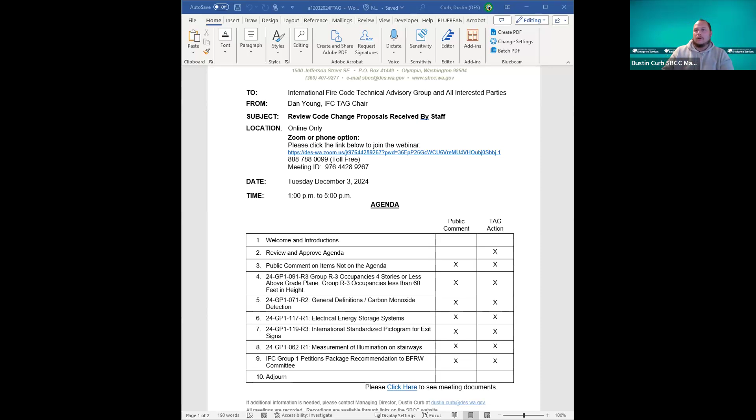So the hope is we get through all that and we have green on all these. And then when we come back Tuesday, we're just going to review this document, talk about anything that needs to be talked about, and move it to the committees in between some of the stuff we're doing. So just, now Dustin, we still see- let's just do the agenda. Yeah, sorry about that, I thought I pressed the final button and I didn't. There we go, we got red, or we got yellow and green. So that's what I think you wanted. All right, yeah, thank you.

So this document is the spreadsheet we've been using and trying to update online. In between the other agenda items today, I'm going to be going back to this to update it so I can be as ready as possible to get this updated and uploaded for Tuesday's meeting next week. So just as I mess with that, bear with me.

Let me pull up agenda item number 4, which is proposal number 091, revision 3. This one was heard at the correlation group last week, and there was a revision put forward there, but it hasn't been seen by this group yet. I'm pulling that up now. And Ken, you're the proponent on this one, and you weren't present there for this revision. I'm pretty sure I sent it to you. Did you have time to review this at all?

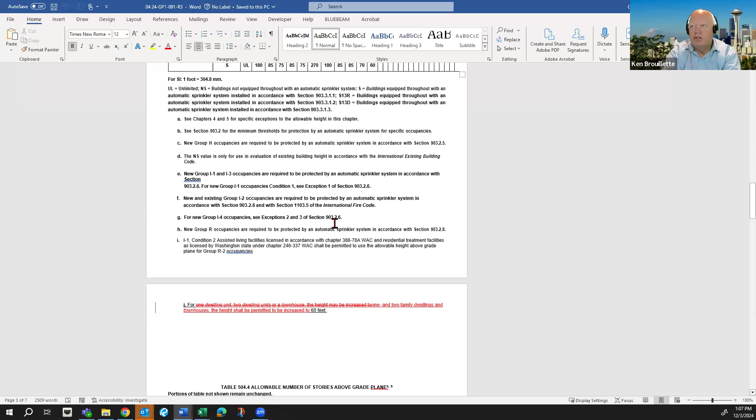Yeah, I have reviewed it and just got a couple of comments on it. First, thank you everybody for meeting without me and trying to work on this. Jeff Shapiro did submit this to you, right? Yes, these are the revisions.

So I've been looking at this a couple different ways. And I guess one of the issues that's still being worked out is the whole occupancy classifications for townhouses. And what he decided to propose is go ahead and just delete that 13D line that I had added in there, which is fine. And then under the R3 section, just put in - make sure I'm in the right spot.

Yeah, he moved the footnote J from the 13D column over here to the type 5 construction line. So what I was hoping for - and in the product I'm looking on my screen right now - is it would just be, and you got to tell me if it's the right way to do this or not, is it cleaner to move forward without showing all of these changes? Because the proposal came in, we modified it, then we have another modification, but when it actually gets presented and moves forward, we're not going to show that this 13D got deleted.

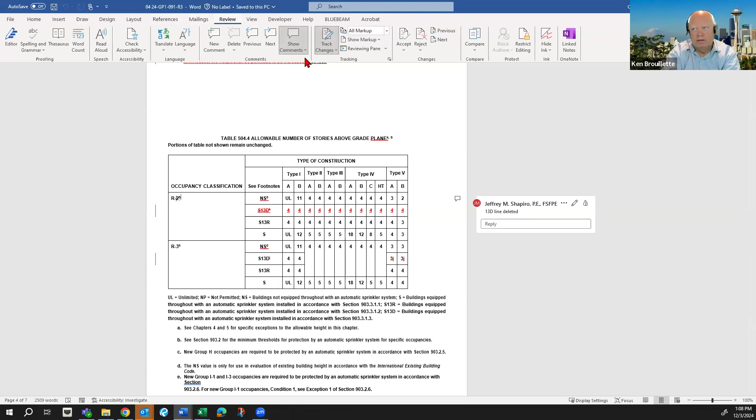I do agree that not showing all the track changes in here would be easier for review. So let me pull up the reviewing pane and just accept all these changes that are in here, and we'll review it that way.

Sorry, this takes me a little time here. I wish there was an accept all button in here, but I guess - there is, if you go up to the accept at the top and click down on that, it accepts all changes and stops tracking. Awesome, well I appreciate learning that today.

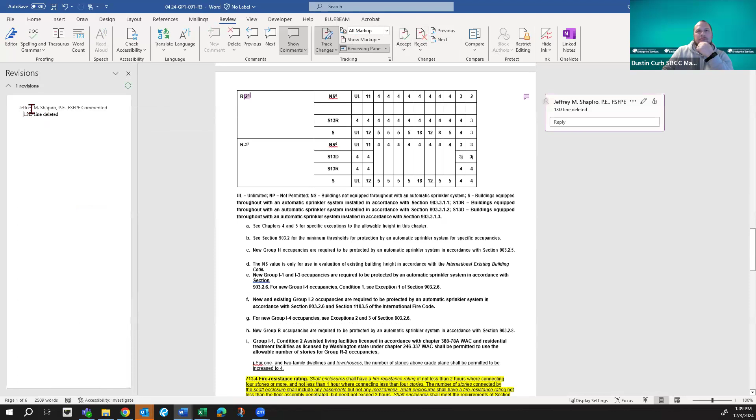Accept all changes - why is that not done? Well, you just need to go up into the comment box and delete that entire line underneath the non-sprinkle row. Yeah, there we go. The box in the table is the only other thing you would have to delete. If you just went up into that box into R2... Oh, I got you. Yeah, remove the line. Exactly, just delete that whole row. There you go, delete entire row. Ta-da, there we go. Okay.

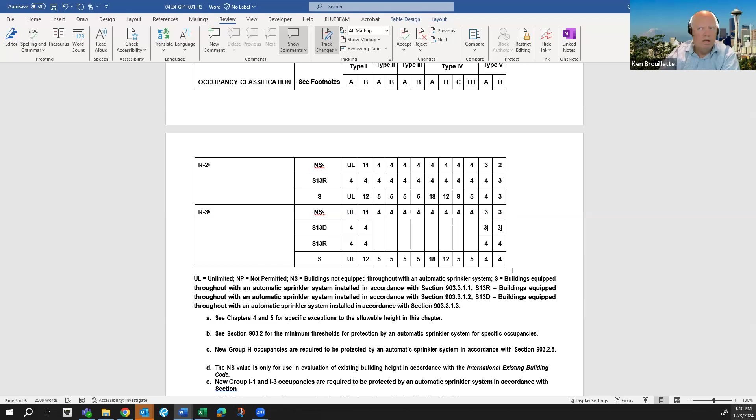All right, so then in the R3 section, he just has the footnote J that was added to the type 5B, and took it away from where it was before next to the S13D. And the footnote J had just been reworded, and just says for 1 and 2 family dwellings and townhouses, number of stories above grade plane should be permitted to be increased to 4. So that would be the only footnote for that table. And then that was 504.4.

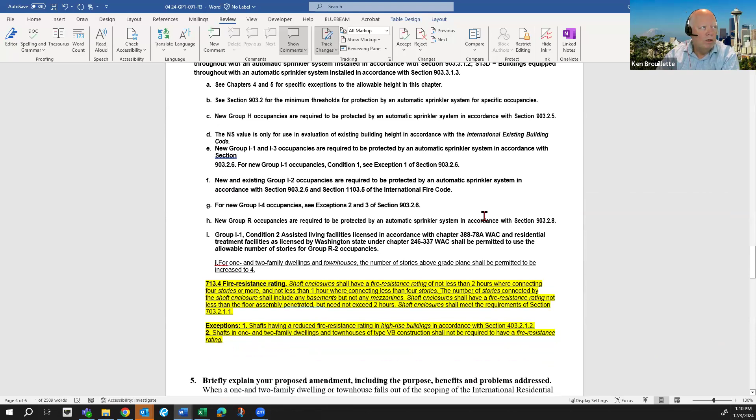Can you run back up to the 504.3? And under the R section has the 2 footnotes there also, as J, and has the same language for 1 and 2 family dwelling towns - the height should be permitted to be increased to 60 feet. So just a correlation for the stories and the feet, which I'm fine with those 2 changes.

And then I guess what was discussed in the meeting was the building code, the 713.4 section for fire resistive rating. So this was something that was added in, right? That wasn't in the... Correct. Okay, so I had a conversation with Ardell Jala, our Seattle building official, this morning.

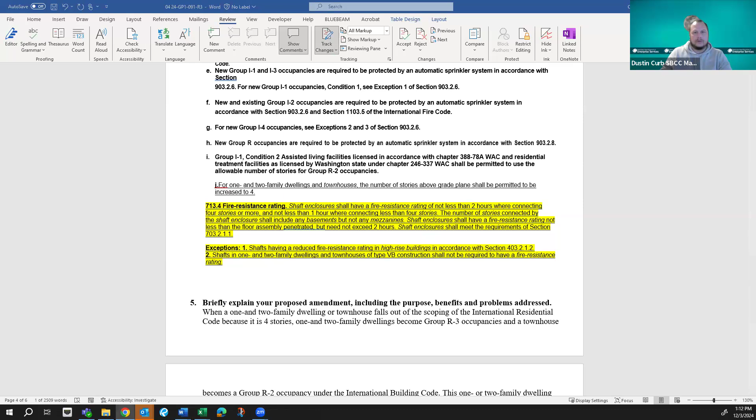I think she's also on the call today. Micah, do you have the 24 building code available? Can you pull that up? I can pull up the online version. Hold on, if you could pull up 712... I'll wait till you get there.

The hot link, the 2024 model in here. Yeah, we got to get you the building code.

Why can't we get the state to buy you an enterprise account for ICC? I think I'm interested in doing that. It is kind of my discretion at this point, and the more I deal with it, the more it seems appropriate. About 712.

Ardell and Micah pointed out section 712.1.2, because we were looking at how we were allowing this in Seattle in the past without worrying about the shafts being rated. I believe this is the correct section: unconcealed vertical openings totally within an individual residential dwelling unit, which we're talking about, and connecting 4 stories or less shall be permitted. So that's where the shafts were not having to be rated.

Hopefully I'm interpreting that the right way, but I don't think exception number 2 is necessary in the 713.4 section, but I'm willing to listen to anybody else that has comments on it. Well, Ardell's unmuted if you'd like to go. Nope, he covered it, that was it. Okay, well, there's no hands flying around, Ken.

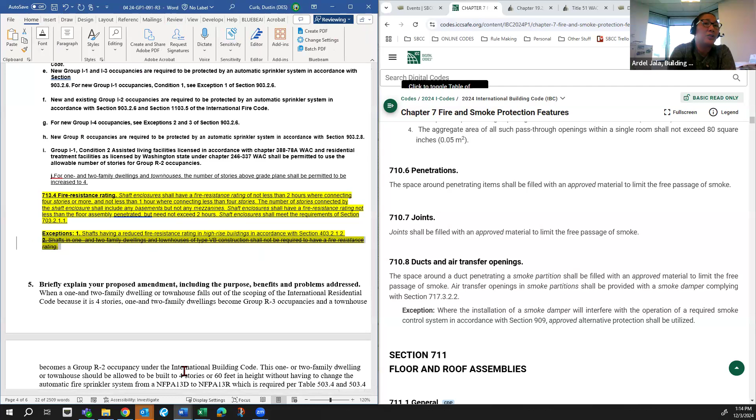So you wouldn't need any of that section at all, Ken, correct? Yeah, we would not. So 713, what he shows there highlighted in yellow is just a reprint of the base code right now. The only thing that Jeff was adding was an exception 2. Okay, so with that one gone, we kill the whole highlighted section. Exactly.

Should have turned track changes off. There we go. So just adding some footnotes in here with some changes in the tables. And you like that one that way, Ken?

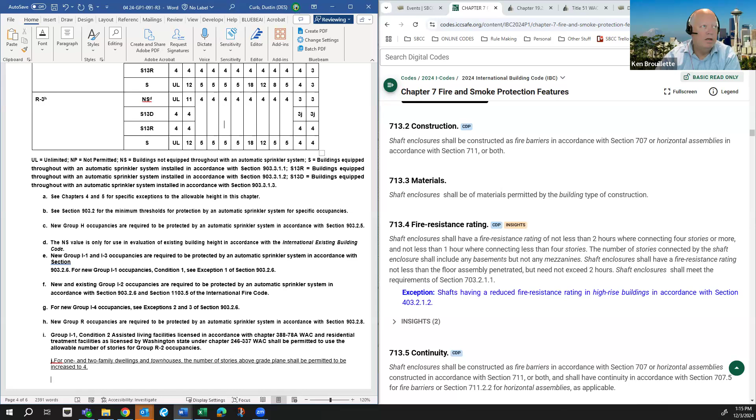I believe it meets the intention of what the original code change proposal was. It was just trying to figure out where the best place to put it. I guess the only thing is go back up to the 903 section at the very beginning, the 903.2.8.1 that he has in there.

Okay, just want to make sure that's the right language there. Because he doesn't show it, I think when you did something it doesn't show it all underlined anymore. Is this whole section and both of these supposed to be underlined? I have to double check here. Okay, something 903.2.8.1.

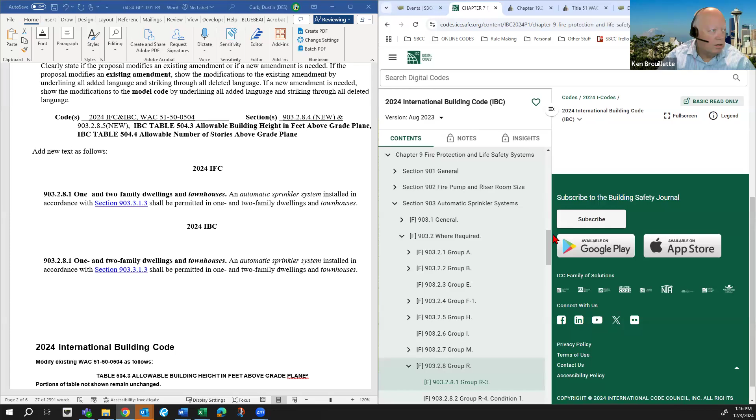Okay, 8.1. Okay, so what he's done -- I think the issue was he was looking at trying to add all that new language in there, but that number is already being used. So it should just be 903.2.8.4, so just change it to the four right here.

Yeah, exactly. Just throw it in there so it's separated out. And there you go.

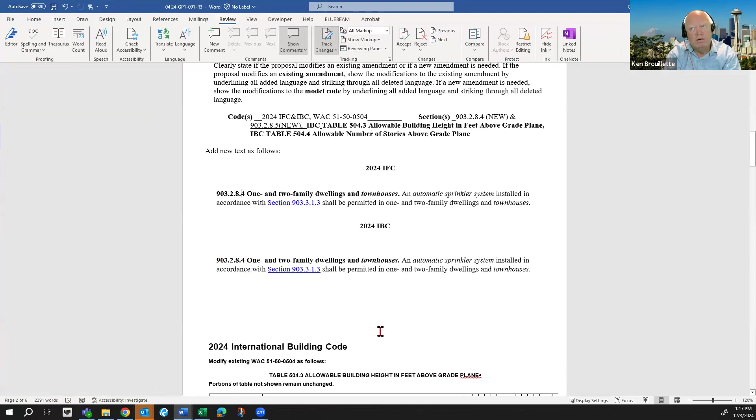Okay, so I think that cleans up what Jeff proposed, and after our discussions this morning with Ardel and Micah on this code change proposal -- now I'm confused. So 903.2.8.1 would remain as currently written?

Yes, because it's still base code language, which just allows for group R3s. It just says an automatic sprinkler system installed in accordance with NFPA 13D shall be permitted in group R3 occupancies. So that can still stay, that doesn't need to get deleted. And this is just a more descriptive one underneath, ours for 1 and 2 family dwellings and townhouses.

Quinn, you have your hand up? Yeah, I feel like it's redundant. I mean, you already have R3 — R3 already encompasses 1 and 2 family dwelling because it's up to 2 dwellings. So I think the intent is to add townhouses. So why not just add townhouses under 8.1 rather than having a whole new subsection?

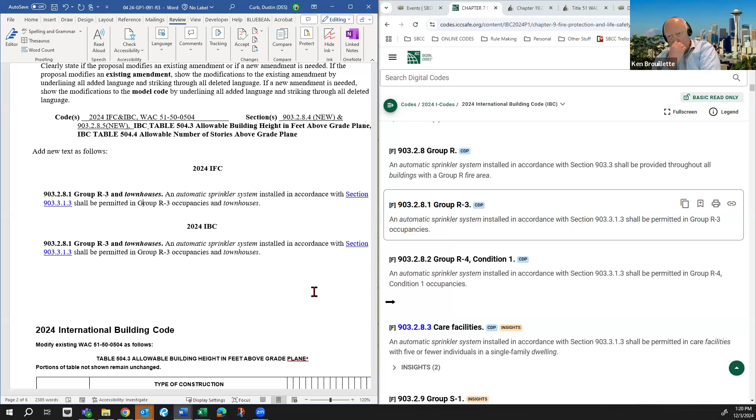You like that one? Yeah, I would just capitalize the word 'group' before, in both of them, to be consistent with the model code. And so you're going to have to show what's underlined, what we're adding. Or underline what we're adding. So it'd be 'and townhouses,' and then also the 'and' in the title there before townhouses.

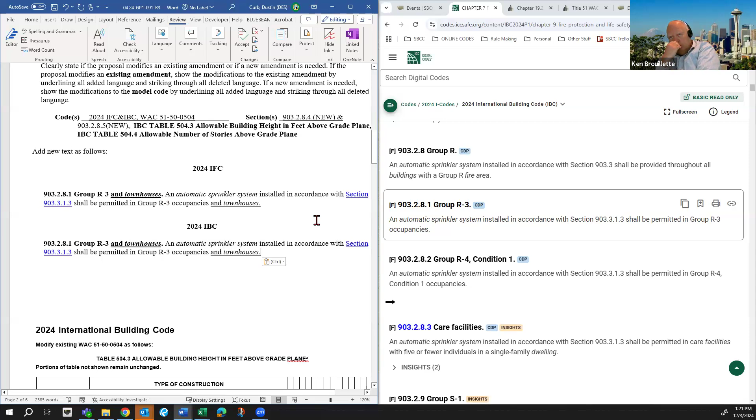Looking nice. And I'm also okay if this doesn't even have to be there too, if it just goes away. I think the tables address the concerns too, so it's fine.

Ardel? Sorry, I missed the discussion in the last meeting on R2 townhouses. And I see that it's been stricken, but is that the decision of the committee then to assume that this only applies to R3s and townhouses within, like, I guess, that are considered R3s, or townhouses that are also R2s?

And I think that was what Jeff and Micah have been discussing - is there an occupancy classification? Does it fit R2? I think Jeff was arguing that they're not R2s. It's one family dwelling, two family dwellings, and single family dwellings located in a townhouse building. So that's where I think the confusion lies right now. Because if you search townhouses, it's not listed anywhere under an occupancy classification. It's just listed in definitions. So I think that's where we got to come up and just make sure we're clear on this.

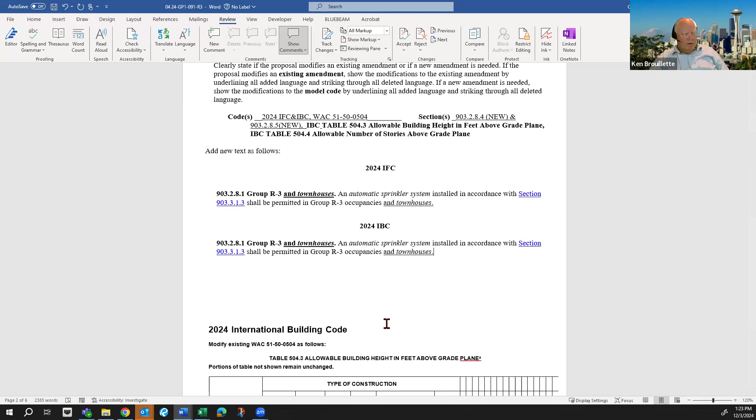Micah? Yeah, so I'm having - well, I know others may be as well - that disagreement there. When you look at townhouse building or townhouse, it's defined. It's 3 units or more in a building. Townhouse unit is the individual single family. So if you're going to do anything here, you need to add 'unit' to be specific to the unit, which could be classified as an R3. But if you're looking at classifying the entire building, it's an R2, because an R3 limits you to 2 dwelling units, and by definition you can't have a townhouse with 2 dwelling units. It's got to be 3.

And then in this section, I'm not even sure why this is necessary to add 'and townhouses' here with the language on the screen. When you go to section 903.3.1.3, it already states townhouses - it states everything that an NFPA 13D system can be installed in. And in that scenario it also says just townhouses in the building itself. And that's, again, where some of this is all stemming from. I'm not against the proposal. I'm not sure where folks are saying that a townhouse, by definition, is an R3, when it's the townhouse unit, by definition, that is an R3. There are 2 different things. They are separated in not just the state code, but also the model code now. Thanks.

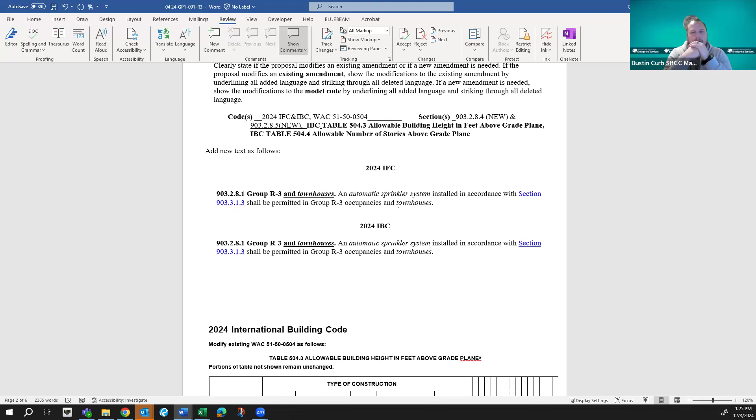So Micah, question back to you - you indicate that you think this is redundant language and it's covered elsewhere in 903. So we're not necessarily hindering ourselves by removing this proposal, or this section of the proposal.

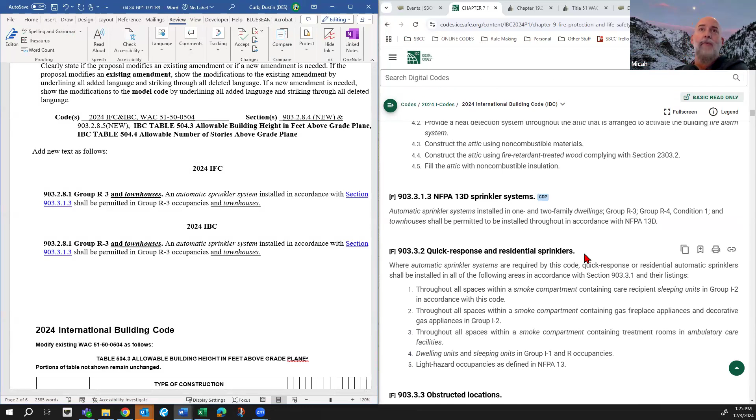I think you were doing a good split screen and you could go back to that if you wanted, but the model code for 903.3.1.3 for the 2024 states, which is what you're pointing to in this modification - it states automatic sprinkler systems installed in 1 or 2 family, group R3, group R4 condition 1, and townhouses shall be permitted to be installed throughout in accordance with NFPA 13D. You already pointed to that section that says you don't have to put townhouses under this scoping, in my opinion.

Again, no - it makes sense to me too. I agree, I'd be fine. I don't know why Jeff wanted to add that in. So, yeah, I'm fine if you just delete it out of the proposal.

Okay, Dave? Yeah, I just wanted to clarify the definition of townhouse within the IBC is a single family dwelling unit - it's not the building, it's a unit, so that's fine. But I agree that removing the townhouses is probably the best path to getting this corrected, so just strike this section of the proposal.

Okay, Quinn? I'm kind of neutral on it, but if I'm going to try to interpret Jeff's reasoning - 2.8 is allowing, whereas 1.3 is how. So 2.8 is where it's provided, and then 1.3 is how you do it. So I think that's where he was coming from - his angle was on these two subsections here. Why he wanted to put it in there was, this is where you're allowing it, and then 1.3 is you install it per NFPA 13D. But again, I'm neutral.

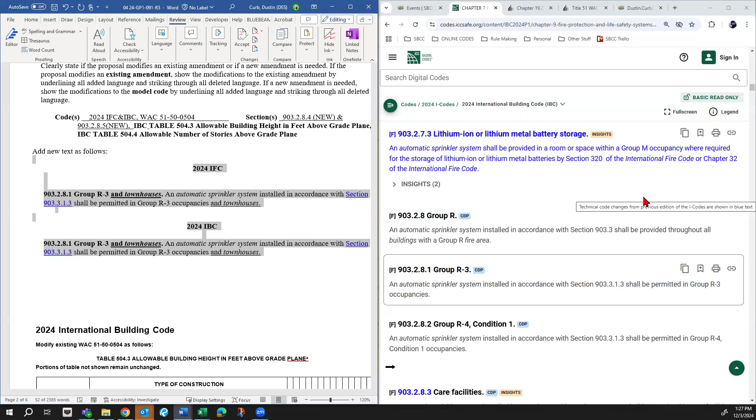Sounds like let's go ahead and remove this one.

Bring that in there like that. And Ken, you happy with it? Yeah, this way, that's fine with me. Anybody else have comments, questions?

Seeing no hands. Oh, there's Micah. I'm trying to get to the right screen. I apologize to get a hand up. And I apologize for questioning more on this. Are we not modifying section 903.3.1.3 to specify that the 13D can be in the townhouse unit and not the townhouse building, or are we still sticking with townhouse building?

Can you scroll to that section he's talking about, Dustin? 3.3.1.3. Yes. Okay.

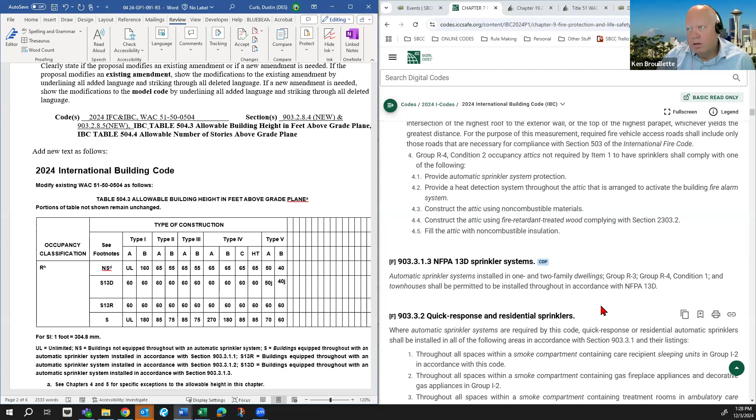So that just says townhouses. And that's as defined, because it's got the definition italicized. Townhouse unit is a single family unit. A building that contains 3 or more attached townhouse units is a townhouse. Right? I just read in the code.

Correct. Dave, are you looking at the 2024? Yeah, no, I'm not. Yeah, the 2024. I wasn't given all the codes, so I can only look at what I got. There's free access, and of course there's no way to do chat on this Zoom, unfortunately. Dave, I'll email you the link. Yeah, if that's what the 2024 says, I'm good with it. It's just that what I had from my history, I didn't have that information. That's the challenge of not having all the code to look at all the things we're doing.

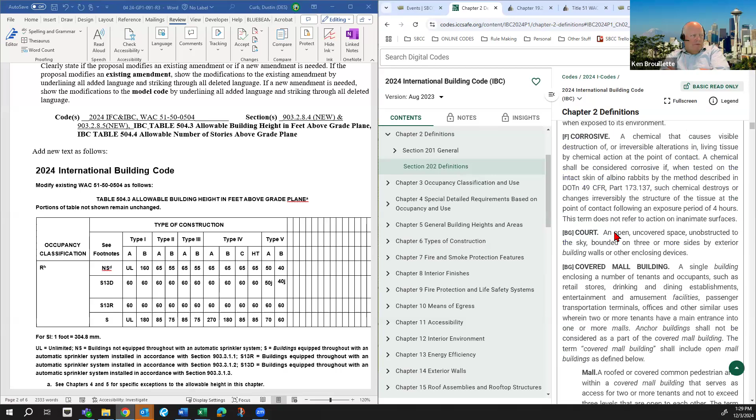Sure, it's Dustin's on there too if you did want to share the definition, but I'll send you a link, Dave. Yeah, yeah, and it was yeah, we're good. We're good, yeah. It was actually in Admin 22-2 that Jeff Shapiro did, that changed the definition in the code. This changed the townhouse definition, and then added the new definition for townhouse unit, where a townhouse unit is a single family dwelling unit in a townhouse, that extends from foundation to roof and has a yard or public way on not less than 2 sides. So, yeah, I'm just expressing my little frustration at how far behind we are with the model code.

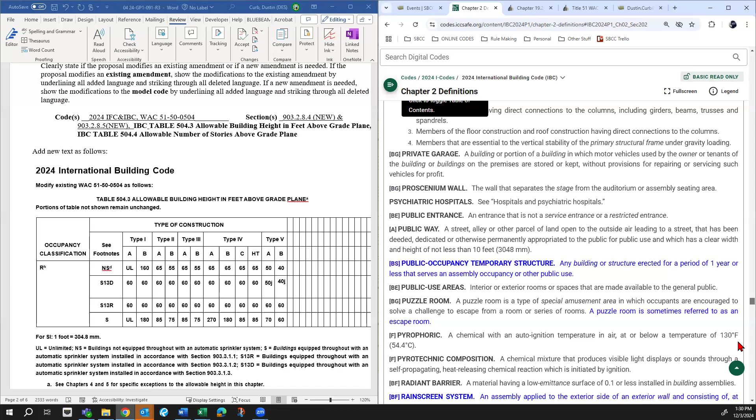So Micah, to make sure I understand this, you're proposing everywhere in 903 that it's currently referring to townhouse should be changed to townhouse unit, because the definition changed, but the use of it in 903 didn't change.

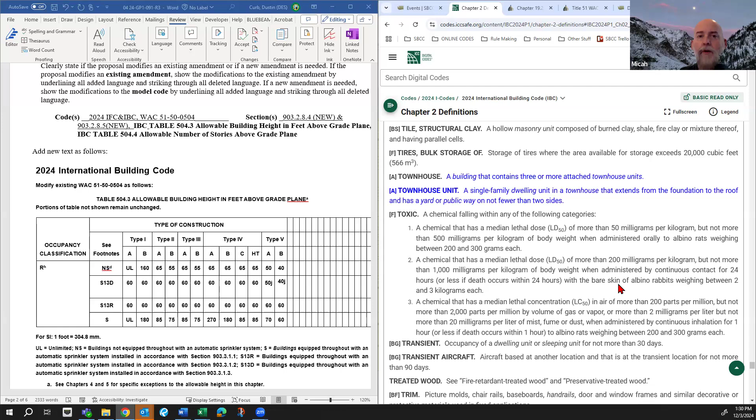If we want to allow these 13D, I think that's what I'm proposing for that 13D section, is to specify that 13D is going to be allowed in the individual unit. And if I remember, Ken, you mentioned the same thing, that this can apply to the unit and not necessarily the overall building. And the light bulb just went on, so thank you, Micah. Yes, I think that does make sense. To add on, to add unit.

So we need to add section 903.3.1.3 into this proposal. Yeah, and just add the word unit and italicize it. Do we keep townhouse and then say 'and townhouse unit', or I don't know.

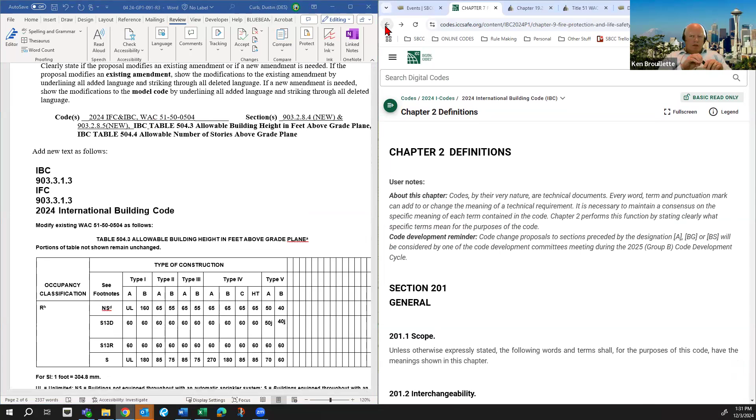So, Micah, are you saying like in common areas that are not within the units themselves, those would still be a 13R? Because if you're specifically calling out unit, then what do you do with the common areas? Well, what common areas do you have in a single townhouse that's ground to sky? Maybe shared laundry rooms, but no, it wouldn't be corridors, it would not potentially be a townhouse, because it's still a single family dwelling unit.

So Ardell said the same thing. I had my mute on. I said exactly the same thing when she said it. Yeah, Dave's voice, I was just thinking out loud. Yeah, yeah, that's a good thought, but yeah.

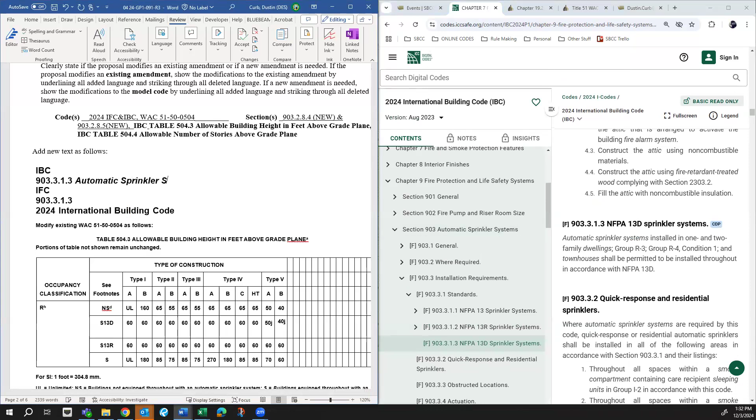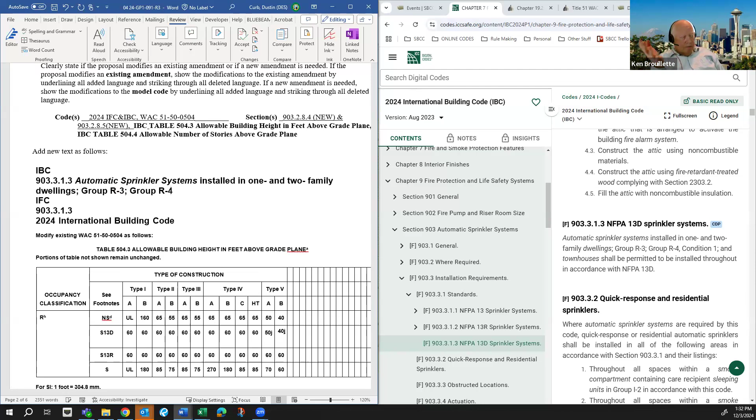And separate from this, thanks Dave, I think you just pointed out a mistake in our WAC. We had originally adopted that townhouse definition and modified it for the WAC, but it's not in there for the 2021. I think that should have been a carryover. We may need to add that to our errata list for the state language. Anyway, side note, but thanks, Dave. It's funny you mentioned that, because I was looking up the WAC today, trying to find out where's that townhouse definition, and I didn't see it. I was like, wait a minute, I thought we did it too. You did. Yep. Okay. So great catch.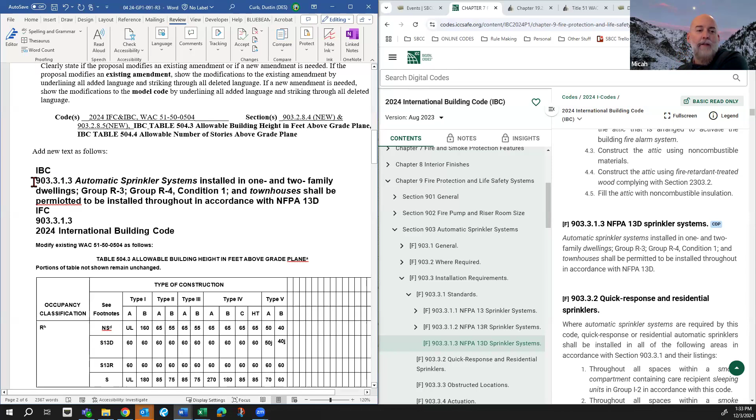And please, everyone, correct me if I'm off on that with the intent. Sounds appropriate to me.

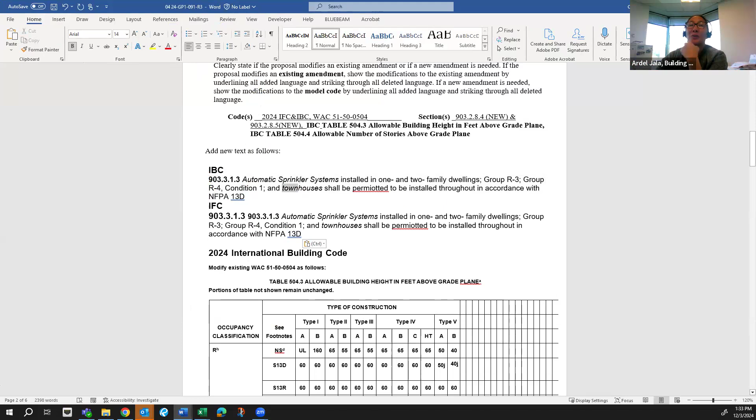Okay, I think it needs to change in the footnote though - townhouses to townhouse unit. I agree, Ardel, that we need to specify townhouse unit. So in both of these sections, townhouses should change to townhouse unit. Yeah, both sections you're showing there, instead of townhouses it should just say townhouse unit. So you're just underlining units.

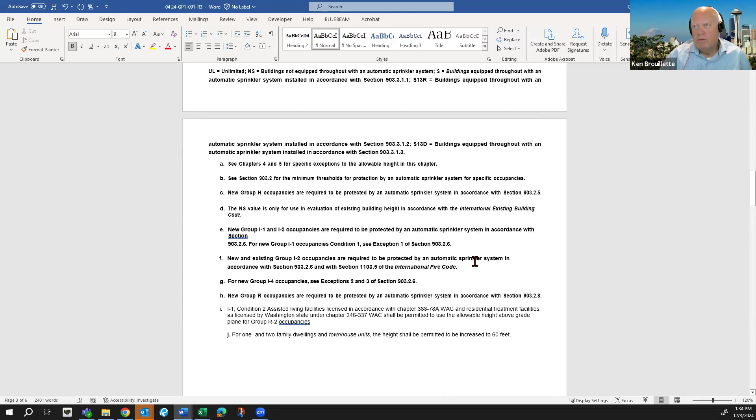And you probably got to fix your permitted spelling so it looks good. No, that's the way it's spelled now. And then in the footnotes we write townhouse units in there. I think that makes more sense and narrows the scope. And that would be for that other footnote too. Let me make sure I don't accidentally save this as the same one.

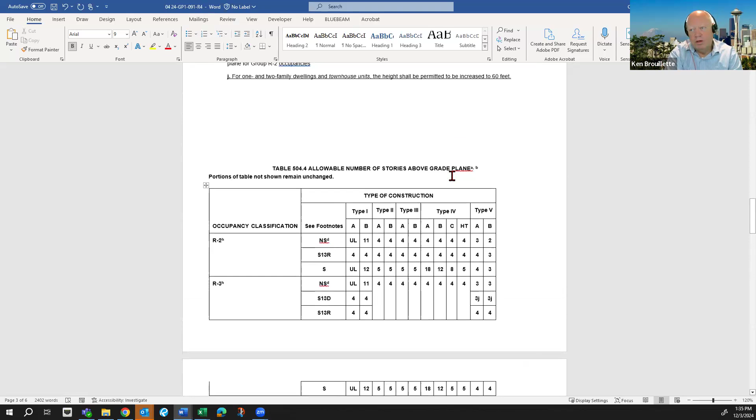Okay, and down here as well. Does that make sense, Micah? I like the thumbs up. All right.

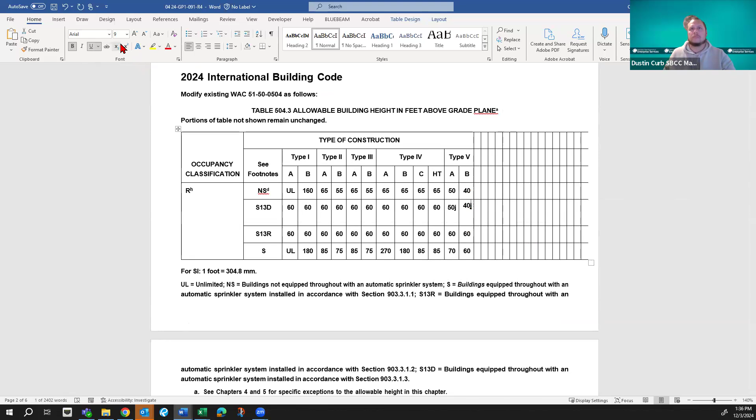All right, this one looked good to everybody on the call? I believe so, on my end. All right, then I'll turn it over to Dan to ask what the TAG would like to do.

Okay, so I think we're at a point, aren't we, for a vote - or not a vote, but a motion. There you go, thank you. All right, do we have a motion? I move we take this proposal, forward it to the building code council for adoption.

I'll second that. Okay, all right, so we have a motion and a second. Any more discussion? Micah,

You're on mute - muted. I think we're having some afterthoughts here. Are we accurate in the table? Are we breaking the R2 townhouse still? R2 townhouse has been removed. So yeah, because we're only talking about townhouse units now.

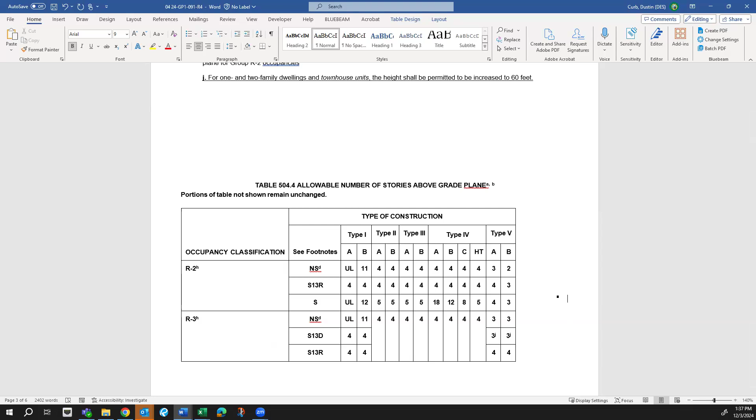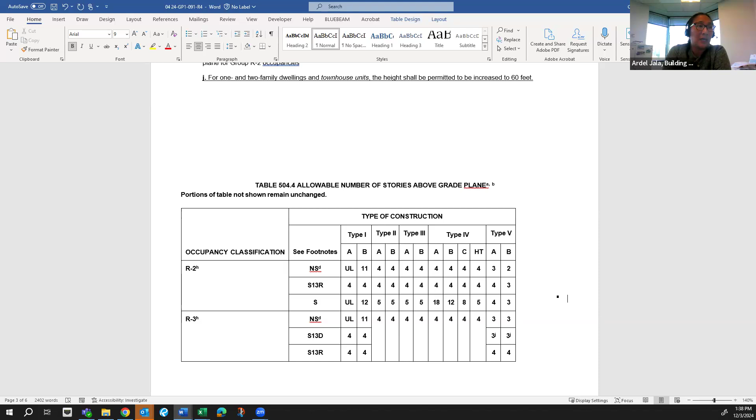That's only what the footnote's good for. Right. Okay, but the building will still have an occupancy classification, and so it will be in conflict with the R2 table limitation of 5B. And I would not permit this on the building code side without a code modification request, because R2 townhouse building is required to have a 13R or a full 13, and a 5B would only allow me 3 stories.

And in a 5B would only allow me, if you go down to the height - so can we add the footnote, the same footnote next to the R2? You want it here next to R2 or next to the 5B? Probably next to the 5B. Yeah.

Quinn, you have your hand up? Yeah, do you think this is where Jeff was trying to add that 2.8 to avoid that confusion, Micah and Ardel? Because if we added that 2.8, that would clarify that no matter what occupancy, R2s or R3s, townhouses would be allowed to be 13Ds based on what Jeff was trying to do. I'm on it. You'd still need to get that footnote attached to the R2 table, though.

I see what you're saying, Glenn. So let's put the footnote next to the 3, like he's showing there, and to the height. Just to make sure we don't - well, that height, that's just an R, right? Oh, is the height already there? Yeah, well, but no, doesn't that - okay, so it's the full R, so the height's already covered. I see, so I think just adding that one more footnote on the other table helps it.

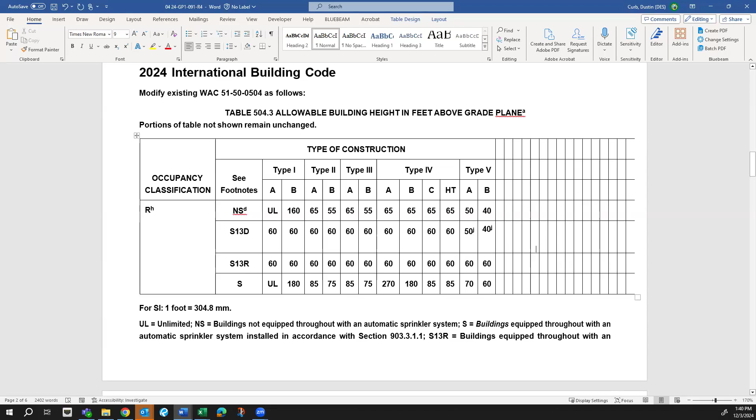And then, I mean, we still have another swing at this when it goes to public comment, right? So we need that footnote to send you to the note. Can you show the note again, please, Dustin? Yeah. I think that gets you there. And we have time to digest this, and if we screwed it up, fix it.

All right, so Dave, are you okay with the changes with your motion? Yes, friendly amendment. Thanks, Dave. All right, and then who was the second on that one? Ricky. Ricky, are you okay with that? I am.

Okay, all right, any more discussion? All right, hearing none, we will go to a vote. All in favor, please say aye. Aye. Aye. Aye. Any opposed? Hearing none, the motion passes.

All right, so Dustin, now we're gonna go to item number 5, looks like. Yes, let me just update my note here real quick.

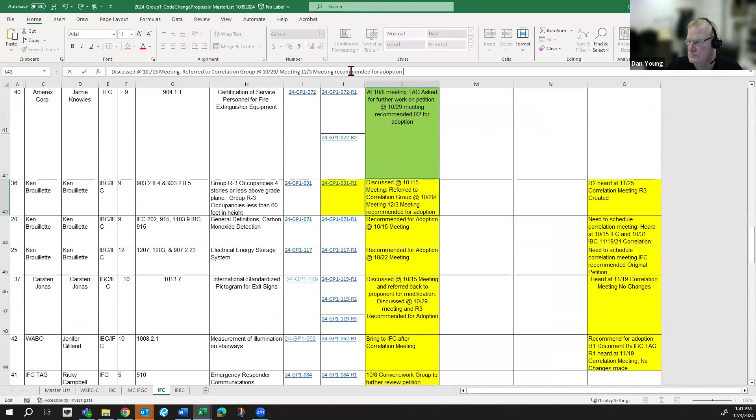All right, next one is 071 revision number 2. At the correlation meeting, a revision was created for this one.

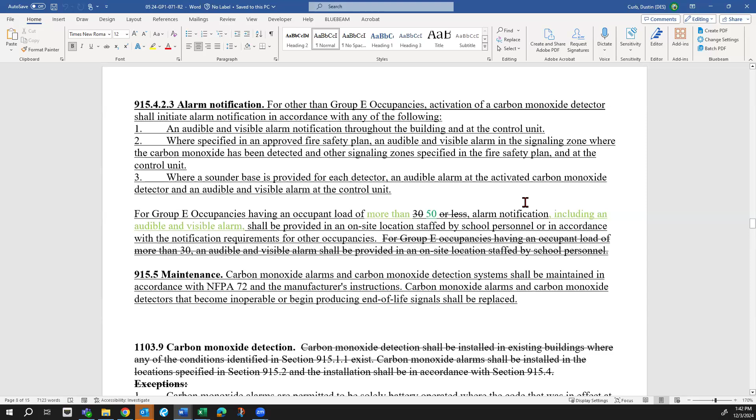And that opened up somewhere. Here it is. This one's another Ken Brouillette proposal. So that was all the way at the bottom, right? Was the revision under the 915.4.2.3 alarm notification? There you go. You had it, did I squeeze by it already? Yeah, I don't know which way you're going now. There, toward, yeah, just before that, there you go.

So this was brought up at the correlation meeting. I don't know what was brought up at the last correlation meeting, if it was brought up again, but this was something they helped reword for Group E occupancies and delete that. I thought they ended up deleting the second line.

Yeah, there you go, keep going. There you go, right there. See here.

Yeah, I think they pulled out this line down here, and the stuff shown in green is supposed to bring our existing state amendment into this section.

And I guess we're just here to make sure, since fire approved it with it, are we okay with just deleting it? Because they felt, and I agree, that it was confusing.

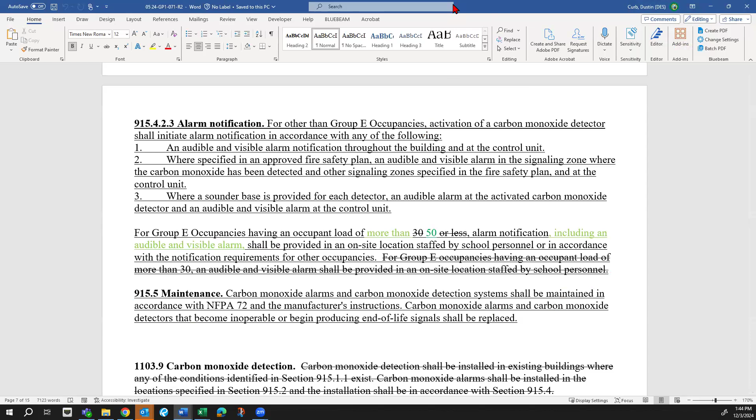Yeah, I was on the correlation meeting and this made sense, so I did vote to approve it. Recommend it.

So I'm guessing when you're showing this, Dustin, again for printing, you can just delete that entire second line, because this was all underlined to begin with, so you don't even have to show that. There you go.

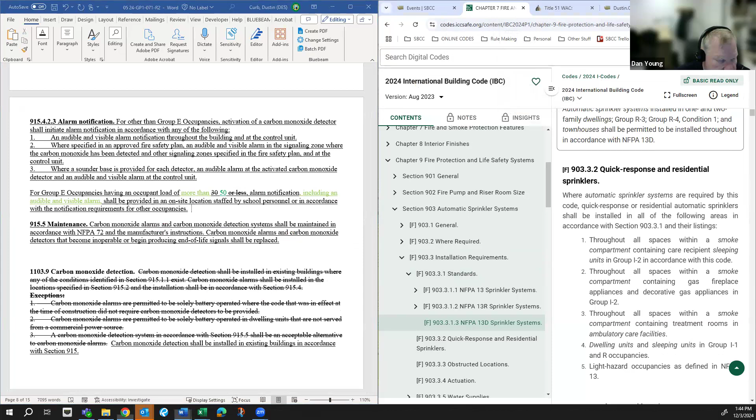And it's bounced around for me. Sorry, guys. There it is.

Mr. Chair, if there's no objections, I'd like to make a motion. Go ahead. I'd like to move this proposal forward as a recommendation for approval. Okay, we have a motion. Do we have a second?

Right, we have a motion and second. Any more discussion? Hearing none and seeing none, we'll go to a vote. All in favor, please say aye. Aye, aye, aye. Any opposed? Hearing none, motion passes.

That just seemed too simple, Dustin. I don't know, well let me see if I can mess it up. No, don't, it's not a challenge, Dustin. Not a challenge.

What's next then? The energy storage. Let me just update that one.

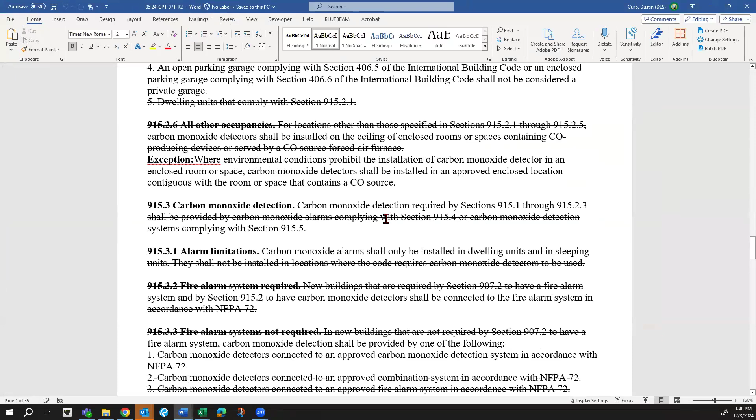Yeah, it does, and I didn't evaluate it, and I think this cycle we were moving away from the sleeping part of it. So if you go up a little bit, it does the—

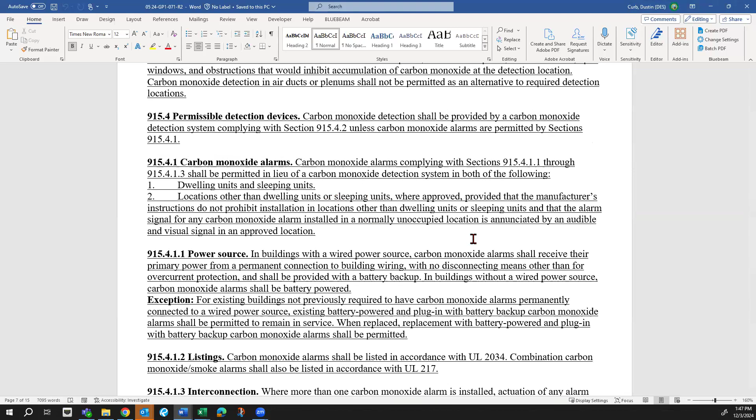Let me see. Yeah, I had it on here. It was 915.4, and then 4.1. So basically, where it's located in bedrooms or sleeping rooms, do we want to add sleeping lofts?

You're asking me, I would have to evaluate it, Quinn. Okay, I think if we're moving it forward, we can catch it at public comment. Okay, I just want to bring that up, it just occurred to me. Cool, nice catch.

Okay. All right, so sounds like we'll just move on to the next one there, Dustin. Okay. Making some notes here. Yep. All right.

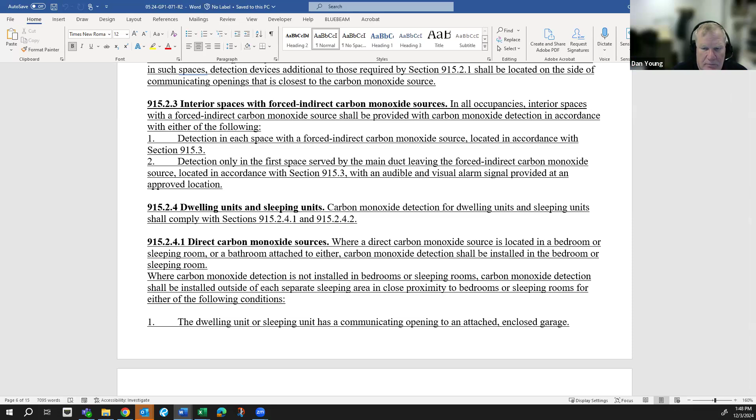And then this one is Ken's again, this is 117 revision 1. So this one went to the correlation group, we talked about it briefly, but no modifications were made. And so this is the same as we saw it the last time within this group.

And so we recommended it for adoption, but we scheduled it for the correlation meeting anyway. So we already have a motion recommending what we have before us here today. So we can chat about it a little, but I don't think there's any need to actually make a motion on it. Okay.

Micah: I just want to verify that section R330 is the correct section. If we're modifying this per Washington state language or an amendment, I'm trying to pull up the state code real fast, but I thought that was a different section. Sorry, maybe I'm screwing it up.

Anything else on this one, Micah? You want to take some time to check that out, or? All right, I'll catch other stuff at public comment if it's necessary, but I don't think it's an issue. Just want to make sure we got the correct number, and that may just be correlation stuff down the road.

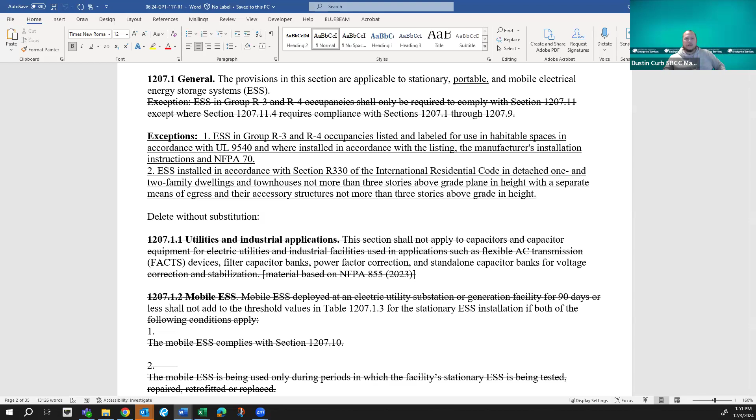All right, since we're not making any changes and we already have a motion from, what was it, the 22nd of October, to move this one forward. Mr. Chair, do you see any reason to make another motion on this? No, I don't, 10-4. Then I'll close it out and we'll move on to agenda number 7, which is 119 revision 3. And I'm just going to change that back to green.

Hey Dustin, Mr. Chair. Yep. Really quickly, so I've been meeting with SEAC specifically on ESS storage, and a big thing that they're working on is making references to NFPA 855. Do we want to make a friendly modification to include 855 in that section?

Thought this is what this is all about. So what part are you talking about, the R330 section? Well, let me go back to that section where ESS in R3 and R4 occupancies listed in habitable space in accordance with UL 9540 and NFPA 855, just a quick and 855. So let me back up.

Are you talking about the R330 section, or are you talking about something in chapter 12? 1207, I'm talking about 1207. I'm sorry, I'm just asking, do we want to make a friendly amendment to include 855? Because I don't think we're referencing 855 at all. But no, which section would that be, Quinn? 1207.1, okay.

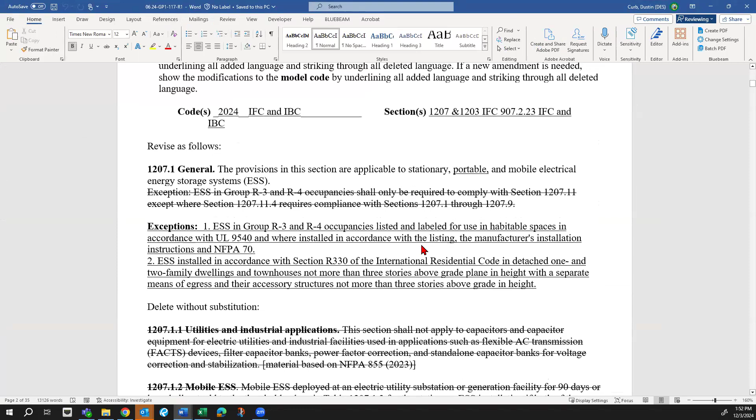So I was looking at under the exception, where it says in accordance with UL 9540. Do we want to add NFPA 855? Because that's where FCAC is going with it, as well as SEAC for R3s.

Hugo, you have your hand raised. Yeah, I was just gonna mention that under the scope, it does mention NFPA 855 for the section under 1201. Okay, I just want to make sure that we're catching 855. Yeah, it's in 1207.1.1, so if you scroll down just a little bit Dustin, you'll see it right there. Oh yeah, we are adding it. Okay.

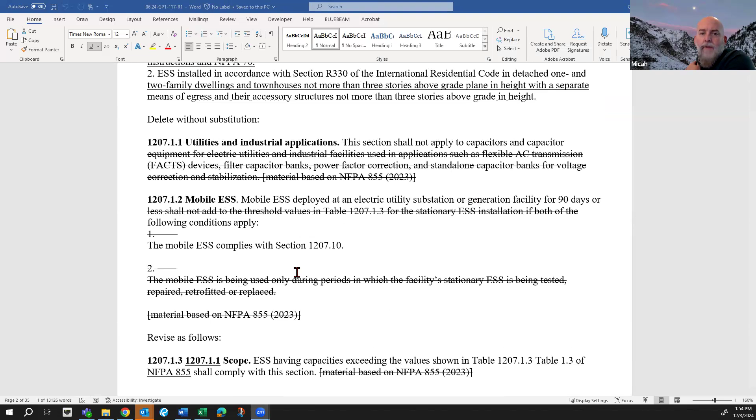And then Micah, you have your hand raised. Yeah, I see that you're adding it there, but I think Quinn is correct. If you go to the top under 1207.1, that's the scoping language, and then you exempt — if you scroll up just a little bit Dustin — if you exempt R3 and R4 ESS from this section, you won't even get to 1207.1.1 to apply that standard. Is that what you're indicating, Quinn? Yeah, that would be my understanding as well.

So I think Quinn is saying that you want to have that in exception 1 also, if these systems in R3 and R4s have to comply with NFPA 855. And I may be off folks, so if I'm wrong there, speak up, don't be shy. All right, so I'm happy with that. I mean, to me that's just a friendly amendment to this.

Okay, Hugo? Yeah, I just want to clarify again, in 1201.1, under the scope for the chapter, it says energy storage systems regulated by the section of 1207 shall comply with this chapter as appropriate and NFPA 855. But the exception doesn't get you there, though. That's what I was trying to get at and what Micah is saying. Because once you get to the exception, you don't get to point one. But anything under that section, even 1207, you still have to use the reference standards that's primarily identified.

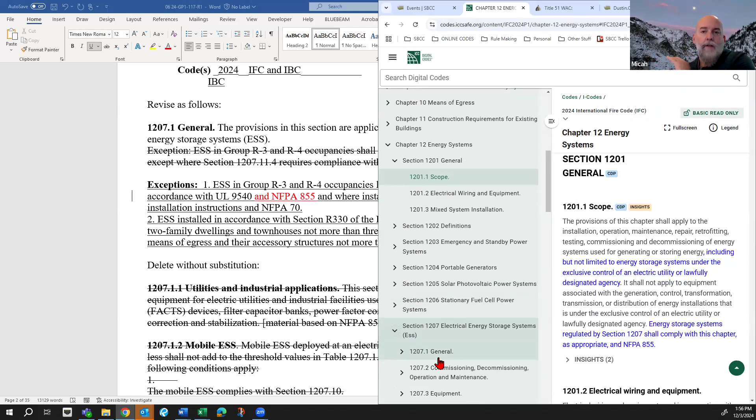I appreciate you going at that code, Dustin. What this is doing, and again if I'm reading my interpretation here, we have the general 1207.1, the provisions of this section shall apply to ESS storage systems, period. Then you have an exception to that, which the R3s and R4s don't have to comply with this section. You'd stop right there. As long as those ESS comply with UL 9540, and Quinn is saying, and I think correctly, that they also have to comply with NFPA 855. You would not apply that because you wouldn't even get to 1207.1.1, because you are already out of this section. You're not required to comply with this section at all because it's an exception.

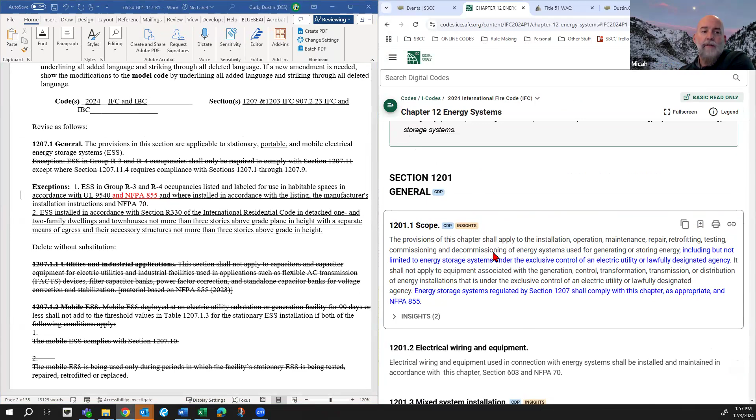So I see what you're saying Hugo, but I do believe I'm going to agree with Quinn on this one, that if you're going to include this as a reference that applies, then it needs to correctly apply to the R3 and R4 ESS that aren't applicable to chapter 1207. I'm maybe off, Quinn, but I think I agree with you. Nope, you voiced my concerns there.

And sorry, I'm a little sick right now, so my throat's a little off.

So if we're going to make a change, we would have to have another motion, correct? Or a modified motion, a modification to the motion, I should say. I don't believe that was done, who did that one, Dave? Well, this one we weren't going to have a motion because it was done in the last meeting. I don't remember who did that one. So I guess we could just go for another motion and move forward from there.

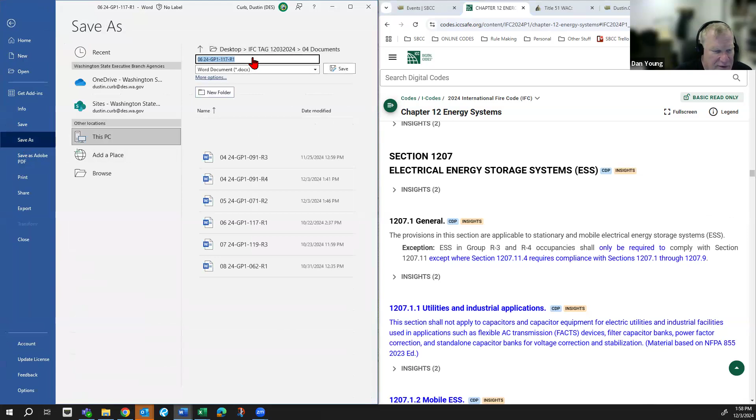Since I made the amendment here, I'll make the motion that we approve this moving forward to State Building Code Council. All right, we have a motion. Do we have a second? I'll second it, Dave. Thank you, Dave. Any further discussion? Hearing and seeing no hands raised, we'll go to a vote. All in favor, please say aye. Aye. Aye. Any opposed? Not hearing, motion passes.

Thanks for humoring me, I'm a little slow today. It's all right.

Okay, well, we'll try again, Dustin, for the pictogram one then.

So yeah, this is the same, I believe, version that was recommended for adoption in, I think, October or November. And then it went to the correlation group and... was that someone's phone ringing?

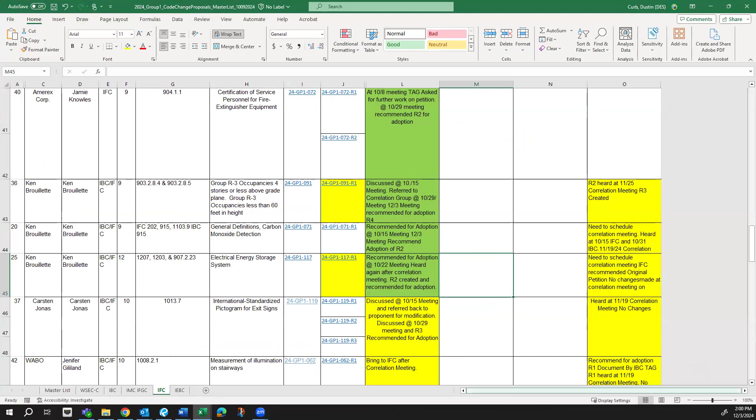Yeah, that was mine. And I see Dustin talking, but I don't realize he knows he's on mute. No, I don't. Thank you.

So we heard this one at the October 29th meeting and recommended it for adoption, revision number 3, which is before us. We'd heard it at the correlation group November 19th, made no changes, and we're just back here to reaffirm our decision on the 29th. So if there's no desire to make any modifications, similar to 117, we wouldn't need a motion to approve this one. Okay.

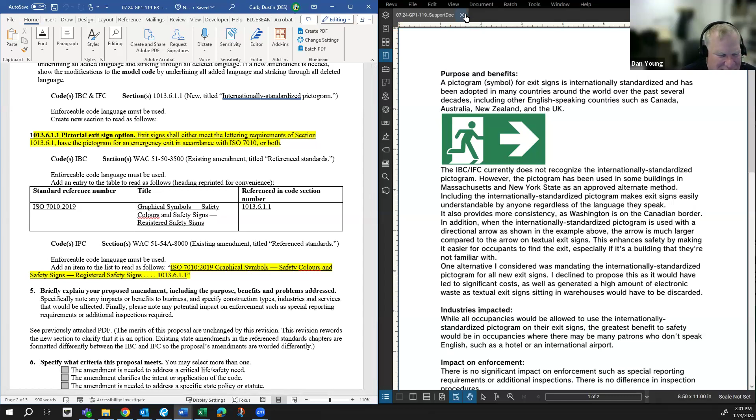Looks like there's no hands coming up, so are we good on this one, guys? Well, we need to give Quinn a moment just in case. Oh, come on, I'm good with this. Shots fired. Okay, all right, just had to throw a little one in there at you, Quinn, but it sounds like we're all good, Dustin. Okay. Yep. Well, now that you mentioned, just kidding. Wait till Dustin's all done and then jump in. That was the plan. Sounds perfect. Okay, at least you're consistent today then. Okay.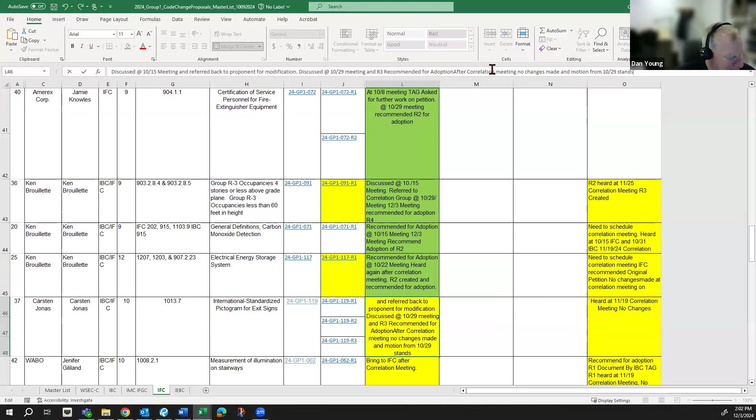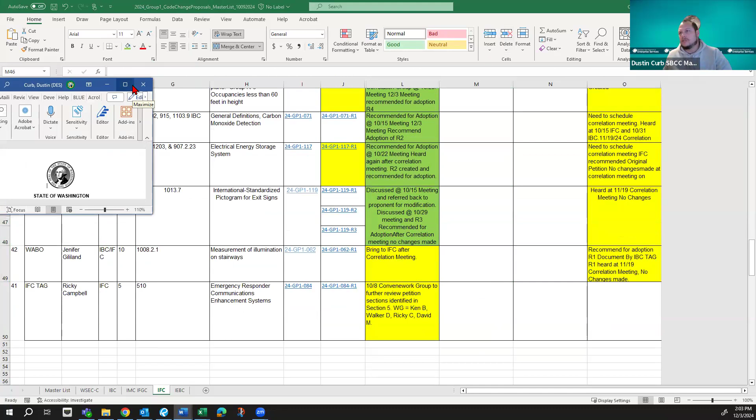There we go. Okay, that brings us to 062. And that is revision number 1. And let's see here, this is 2. So we heard this one at the correlation meeting. No modifications were made at that meeting. And I don't think that we have any specific motion on this one. And then IBC tag made a recommendation to adopt revision 1. And then we heard it on the 19th with no changes made to this revision.

This one is from Jenifer Gilliland, on behalf of WABO. And so we have some WABO folks here, but I don't know if Jennifer's here. No, she's on the SEAC meeting right now, but Micah's here to talk for her. All right, Micah, is there anything we should know before we make a motion on this one? I see Rich and Quinn are both on here, but we got Rich's hand up. Go for it, Rich, you beat me to it, Micah.

So, Rich Williams. Yeah, we had brought this modification to the national level, and where it currently sits, what you see in front of you is what was adopted or is as modified. Obviously, we're waiting for public comment and final approval, but the idea behind this was to eliminate the reference to each landing, with the idea that the illumination levels apply at all treads, and by eliminating this reference to each landing, it hopefully reduces the possible impact of an inspection where you're going to be measuring at each and every tread and landing. We feel the language still makes clear that this illumination level applies across the whole stair flight, and it cleans up some other stuff at the national level that was cleaned up further with our modifications. So anyway, we feel that this is a pretty good compromise in the language and gets us where we need to be.

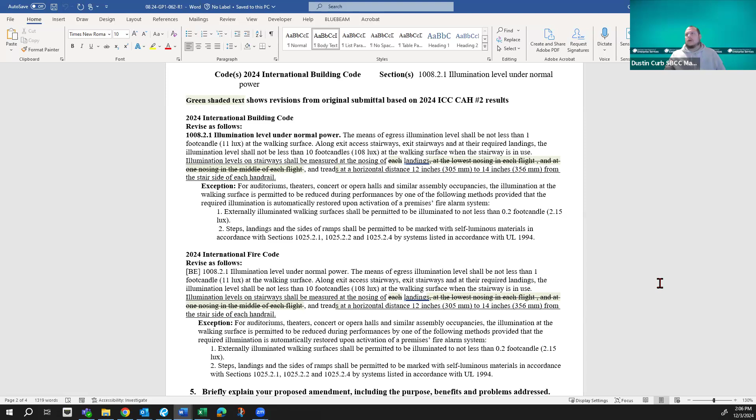All right, with that, one is recommended for adoption today. I have one more here. So the rest of our agenda, we have pretty much what's the document I have on screen here. I've got some updates to do to bring the most current revisions into line so everybody can see the different revisions as they go.

The one thing that wasn't on our agenda today is number 084. We were looking for some further work on that, but I haven't seen a revision come back in from the work group. If it's amenable to the group, we could open up revision 1 and talk about it here today. In our motion to approve agenda item number 9, we weren't going to open up the whole package for discussion here today. So what would the group like to do? We have some extra time at the moment.

And you're sure that you didn't get a second revision on that? Let me double check. Who would I have received that one from? Received from me too. Okay, from Ken and Ricky. I'm pretty sure. Let me just double check, guys. It was number 084.

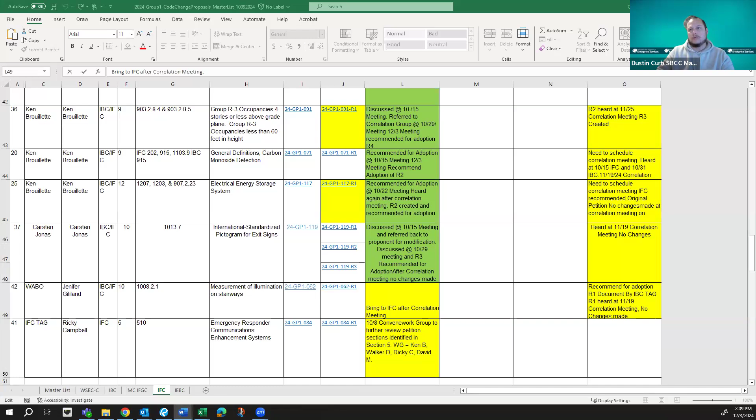SPCC or SBCC. Let me see. I would like to get this done if we could. Oh, I have it right here. Yeah, so that's my bad, I got it on the 7th. So let me open it up and we can discuss this one. And just a reminder for anybody from the public here today, we're meeting again next Tuesday. I'll have this revision posted for digestion there as well.

Okay, sorry for missing that, guys. And do you guys want to talk about the changes made at the work group? Yeah, so this is my proposal, but I did have to lean on Ken and David pretty hard. I'm not that familiar with this stuff, so if you don't mind, Ken, speaking on this.

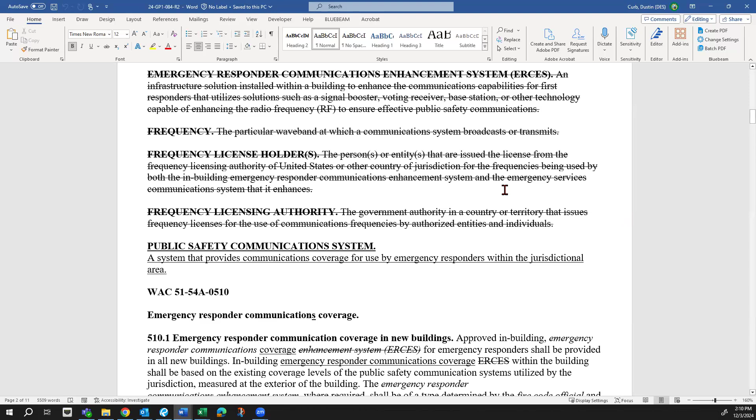No, that's fine. So we went through and looked at all the existing state amendments, and since we had a lot, we had to go through renumbering things, deleting things that were no longer necessary because they were now in the base code language. That's kind of what you're seeing here. So if you start at the definitions like you're showing there, we did not need those first 4 definitions anymore in our state WAC because they're now in the model code. The public safety communication system, we added that definition in.

Going down to 510.1, I think we might have added in the S there. I'm just trying to figure out any of the other changes.

So one of the changes is the 510.1.1, the radio frequency evaluation. This was an item that was added in so people understood what needed to happen to evaluate the existing levels of communication coverage. It wasn't in the current code. So it was more or less explaining what a radio frequency evaluation is, since it was never really discussed before. It's being brought in here to make sure people understand what a radio frequency evaluation is.

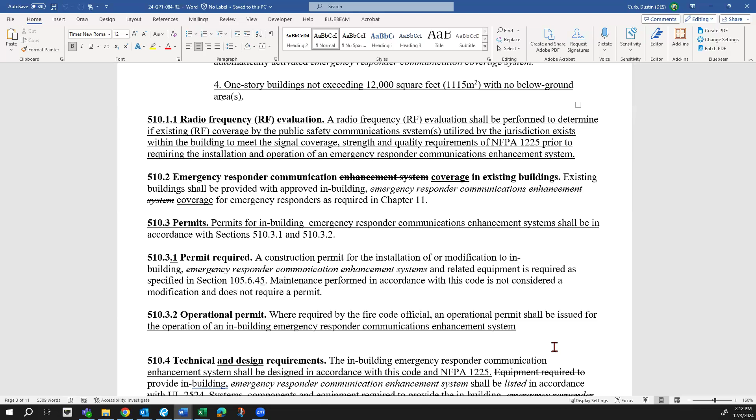So this is again something that's proposed for the 27 code that got approved, but we're just trying to bring it here like we did for all our other 510 sections, to try to get the latest and greatest in there. Let's see if there's anything else - signal strength and quality.

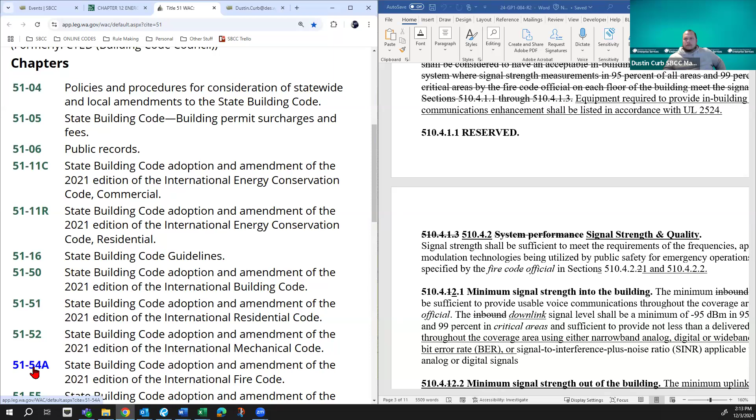And then you could - 510.4.1.1, that's reserved, is that in an existing WAC section? Yeah, so you're gonna have to - I don't know if you can do a side by side showing that. And I'm sorry, this has been like an entire month since I've looked at this, so.

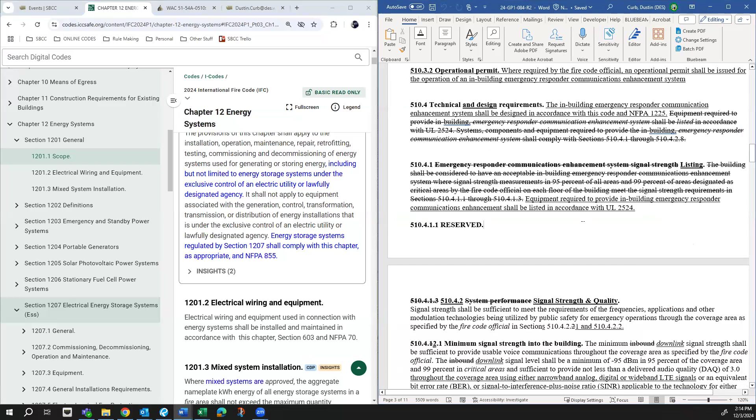So as far as this one, this just goes away and we retain the number, because the 510.4 section is being rewritten. If you look on the right-hand side, the 510.4 just says the technical and design requirements are all going to be in accordance with this code and NFPA 1225. The 510.4.1.1 in the WAC section, that was the minimum signal strength into the building. That's already outlined in 1225, so we don't need that section anymore.

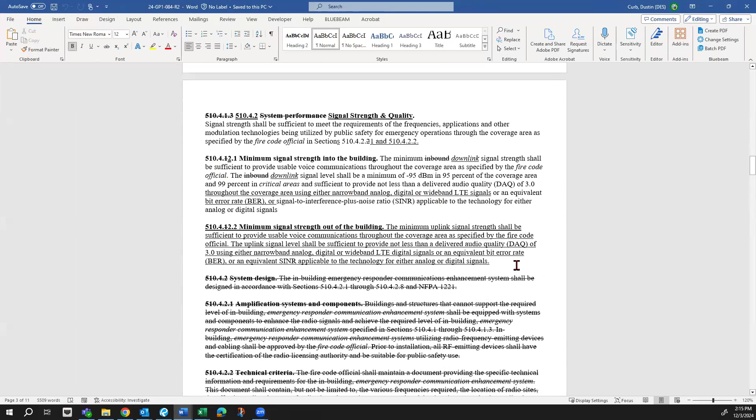That's why it's reserved. And it's redone in the 510 also, specified again in 510.4.2.1, minimum strength into the building, where we do have some more specifics there. So some of the things got renumbered, relocated. I apologize, it's kind of hard, my brain is just trying to remember all of the different changes here.

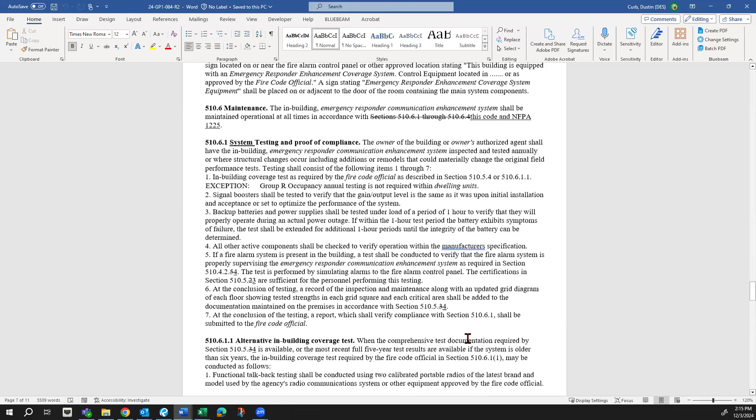And I can't remember, Ricky, did we clean up the explanation on the cover sheet paperwork, number 5? We did, that's not how I had originally proposed it, so we did clean it up. Yeah, okay, so yes, the explanation.

Ready. Does anybody have any questions for Ricky or Ken? I've not seen any hands.

As far as this one goes, we didn't have it posted for public to digest today, so I would just say we'll include this as a specific item on Tuesday's agenda. Does that sound like a plan, Dan?

What time's Tuesday's meeting? Because Ricky and I have a Seattle Fire Code Advisory Board meeting from 1 to 3 on Tuesday. It's tentatively slotted from 1 to 4 with the Outlook holds that we sent out. As far as official notice of that, it hasn't gone out, so we do have room to shift it if it is workable for the group.

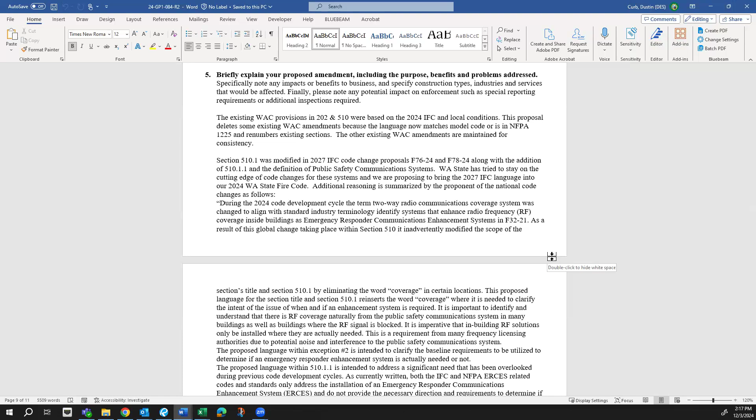If you still had the same time, I don't know how many things you're going to have on the agenda, but if you could put this at the last of the agenda, then Ricky and I might be able to jump on it. As far as everything else on that agenda, let me bring over today's agenda. It would be just item number 9 plus this particular proposal. And I would hope to get this particular proposal done before we deliberate the entire package to send off to the committee.

So I'm not sure, is it, can we make available, for folks to go in the morning? Like I'm available in the morning. It's just hasn't been our status quo to do that.

Do you think we can get those two banged out? I think we can, right? Both of those done in an hour? I'm not sure, it depends on how much comment comes out. I don't think that the TAG is going to necessarily have a lot of comment on the entire package going to the BFRW committee. There may be some public comment coming through. I don't have any indication that there's any contentious items in this package, but I see the portion that might take a little bit more time is just letting the public have that opportunity to comment before we recommend the package. It is likely though we could finish within an hour.

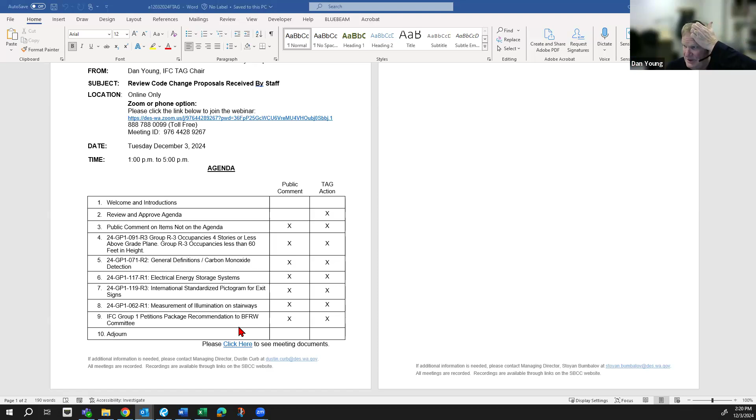Okay, well, I think we're pretty much done. So the next meeting will be the 10th from 2 till 4. Yep, and we will hopefully finish up at that time. I think we are primed to do so.